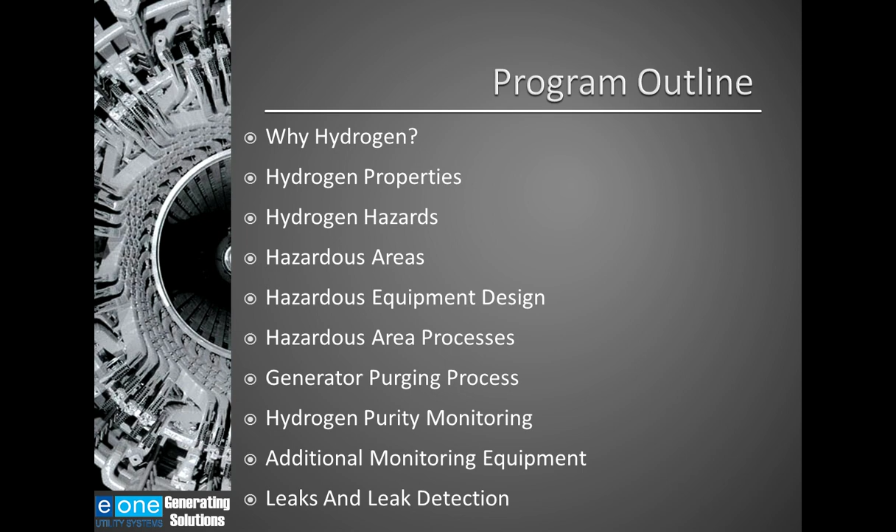We'll begin by reviewing why hydrogen was selected. We'll review the properties of hydrogen and the hazards associated with working with hydrogen. We'll discuss hazardous areas and the equipment design and processes necessary to ensure safe plant operation in this environment, including an overview of the key elements of a safe generator purging process. I'll give an overview of the different types of hydrogen purity monitoring systems and review additional generator monitoring equipment. In closing, we'll review hydrogen leaks and leak detection methods.

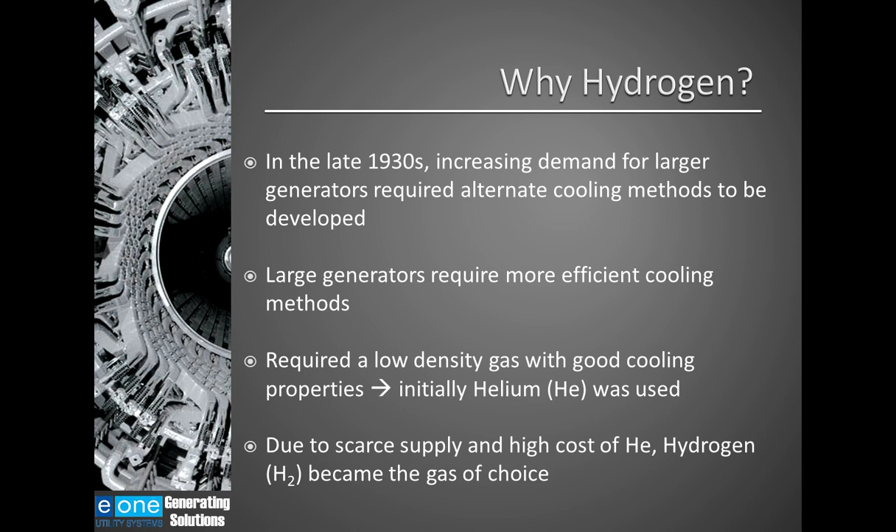Back in the late 1930s, increasing demand for larger generators required alternate cooling methods to be developed. These larger generators required a more efficient cooling method. They were looking for a low-density gas with good cooling properties, and initially helium was selected. Due to the scarce supply of helium and the relatively high cost of helium, hydrogen became the gas of choice.

Hydrogen provides less windage or frictional losses in the rotating rotor of the generator. That's because at generator operating pressures, the relative density of hydrogen is 4 times less than air. Hydrogen has better heat transfer characteristics than air - it is 14 times more efficient at removing heat than air. That is to say, 1 pound of hydrogen will remove 14 times more heat from a given environment than 1 pound of air. For the equipment manufacturers, this all equates to more megawatts per pound of iron.

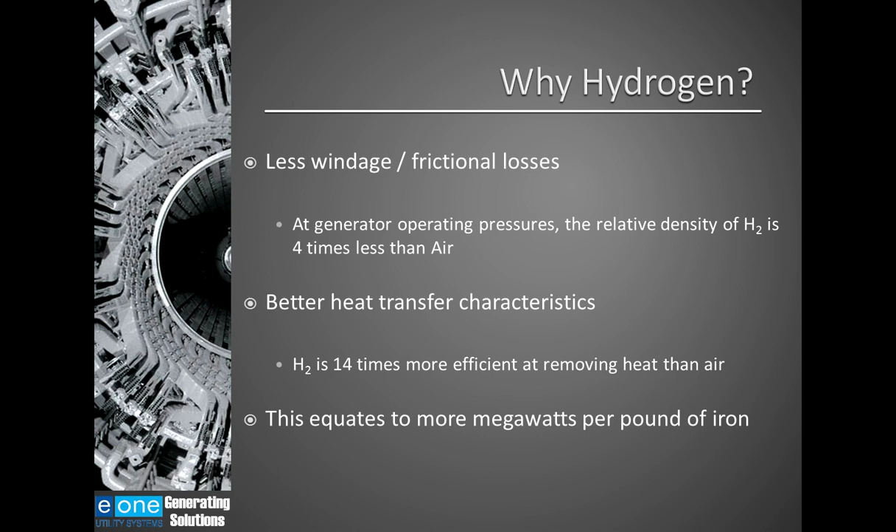Some additional facts about hydrogen's use as a cooling medium. Hydrogen-cooled generators are a sealed environment which prevent contamination within the generator. They are also pressurized vessels. The increased pressure suppresses the partial discharge phenomenon and increases the level of voltage required for component breakdown. A pure hydrogen environment prevents oxidation, which allows generator manufacturers to select lower-cost materials when designing the internals of a generator. Pure hydrogen does not support combustion. Currently, there are more than 10,000 hydrogen-cooled generators operating worldwide.

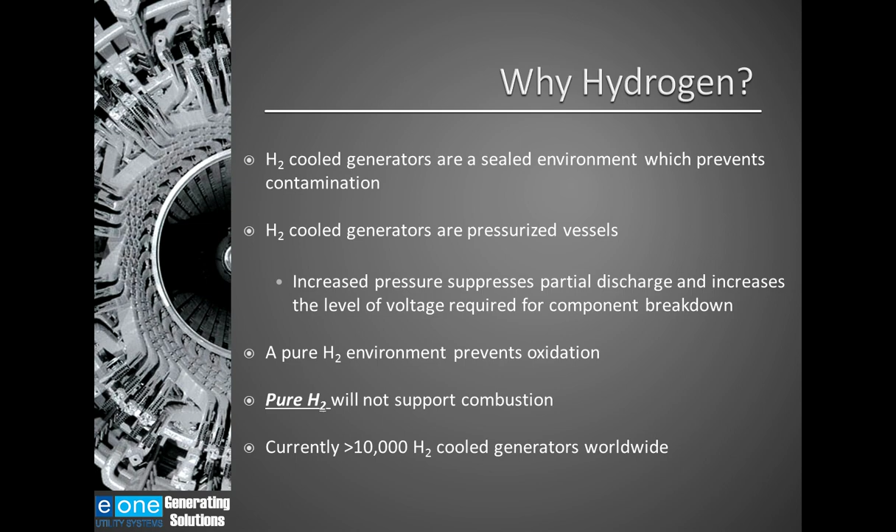For all the chemical engineers in the audience, we'll review some of the properties of hydrogen - this is right out of Praxair's safety data sheet. Hydrogen is a colorless, odorless, and tasteless gas, which makes it undetectable by human senses. Hydrogen is non-toxic, but it can be suffocating by removing oxygen from confined spaces. Hydrogen is not a carcinogen. It is the lightest gas, which allows it to diffuse readily in air.

It's non-corrosive, but it will reduce the mechanical properties of some metals, resulting in embrittlement. Hydrogen burns with an almost invisible bluish flame, which makes it very difficult to detect during daylight conditions should there be a leak in any of your hydrogen auxiliary equipment in your power plant.

The explosive limits of hydrogen are the widest of any combustible gas, ranging from 4% to 76% by volume in air. And the auto ignition temperature in air is very high, 566 degrees centigrade or 1051 degrees Fahrenheit. So if you had a combustible mixture of hydrogen in air, you would have to heat it to 566 centigrade for it to catch fire or cause an explosion.

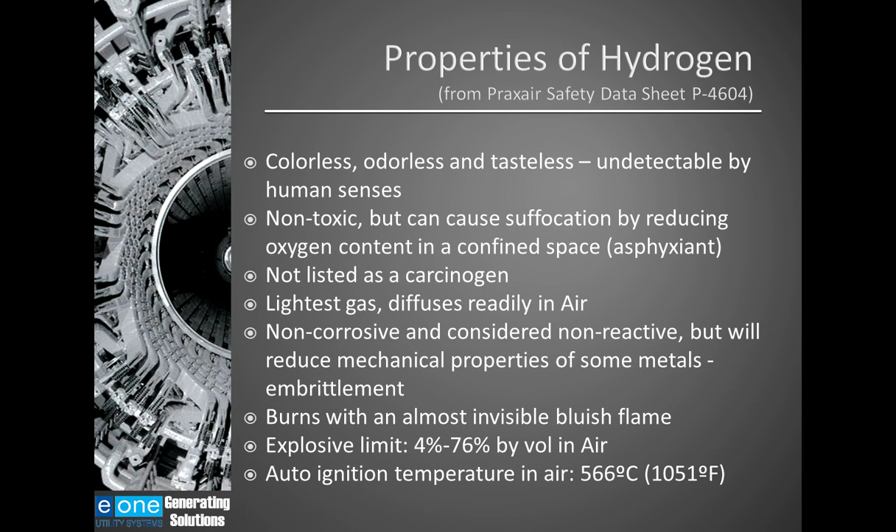Most people are familiar with the elements necessary for fire, represented here by the fire triangle, where you have air plus a fuel plus an ignition source, and that will result in a fire or explosion.

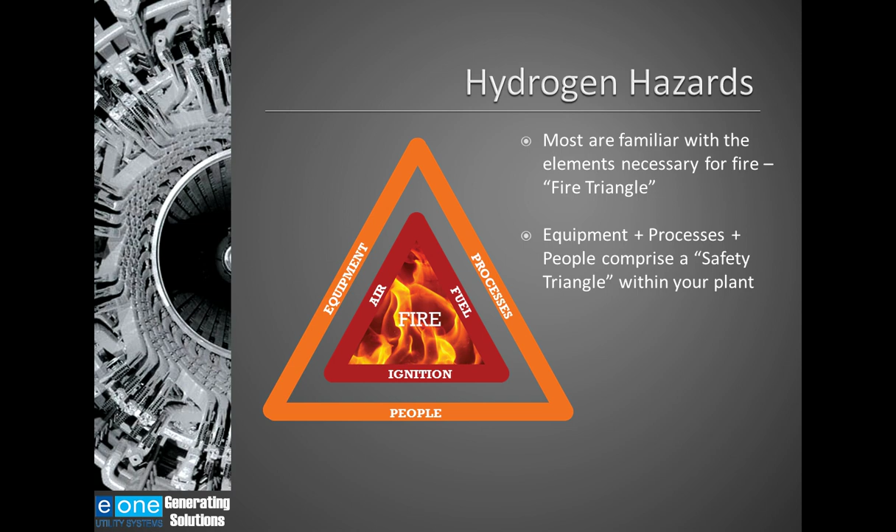Today we're going to introduce you to a concept of a safety triangle comprised of the right equipment, the right processes, and the right people to yield a safe plant operation.

In addition to the inherent risks of working with a flammable gas such as hydrogen, following are some additional risks we're being faced with in the power industry. The fleet is getting older and being asked to operate beyond the original life expectancy. Hand in hand with that, the associated hydrogen auxiliary equipment is getting older and potentially outdated when compared to today's industry standards, which we'll discuss a bit later on.

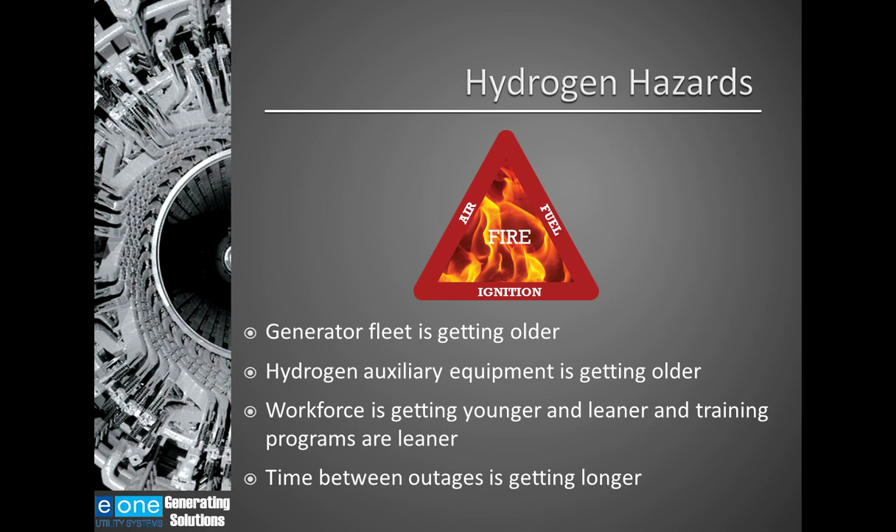The workforce is getting younger and leaner, and compounding this, the training and apprentice programs that are available today aren't what they were even just 10 years ago. And lastly, the outages are getting spaced further apart to maximize runtime. This places additional stresses on the equipment and staff.

Even well-designed and maintained generators can become compromised by these serious operational challenges. We know if proper standard operating procedures are not followed, you can have some very serious problems, including equipment damage and loss of life.

Now we're going to review the specifics of hazardous areas in the power station, the equipment that's designed to operate in these areas, and the important processes necessary to ensure safe plant operation, our safety triangle.

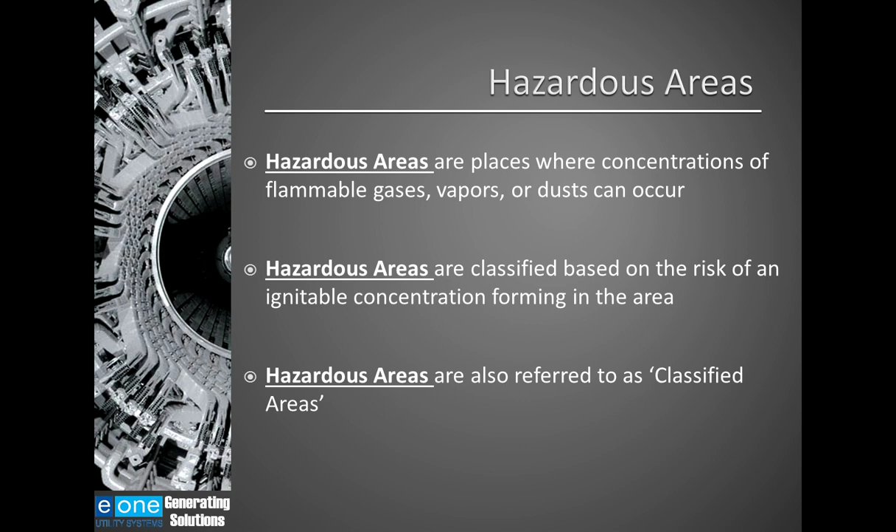So to begin with, hazardous areas are places where concentrations of flammable gases, vapors, or dusts can occur. These hazardous areas are classified based on the risk of an ignitable concentration forming in the hazardous area. These hazardous areas can also be referred to as classified areas. An area classification refers to the rating applied to the area based on the risk of a flammable concentration occurring in that area.

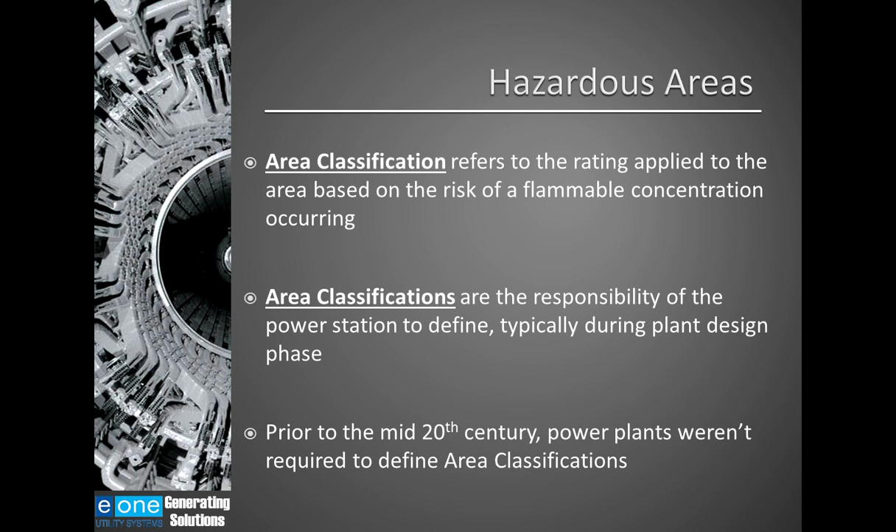These area classifications are the responsibility of the power station to define, and this typically occurs during plant design phase. Prior to the mid-20th century, power plants weren't required to define area classifications, and we found during retrofit and upgrade opportunities this has led to some confusion because power stations aren't even aware of what the hazardous area classification is for their hydrogen auxiliary equipment.

These hazardous area classifications are broken down into 3 zones as they're referred to. A Zone 0 area is an area where a flammable mixture is present at all times. A Zone 1 area is an area where a flammable mixture is sometimes present during normal operation. And the last zone is referred to as Zone 2, and this is an area where a flammable mixture is present only during abnormal conditions. These Zone 2 areas are the applicable area classification for most of the hydrogen auxiliary equipment in your power station.

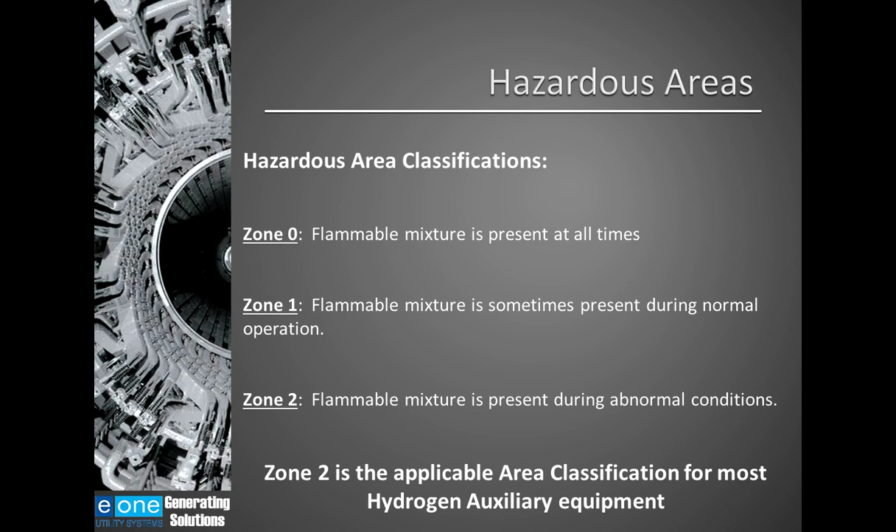The illustration on the screen here is an example of an equipment OEM defining the Zone 2 area created by their piece of equipment. That is to say, within this piece of equipment, there's pressurized hydrogen in the pipework and in the instrumentation, and as a result of that piping, there is a risk of a flammable mixture occurring during abnormal conditions in the hashed out zone that they've illustrated by this picture. These are the drawings that are used by the power stations as part of the plant hazardous area assessment for defining the different zones and classification areas in their power stations.

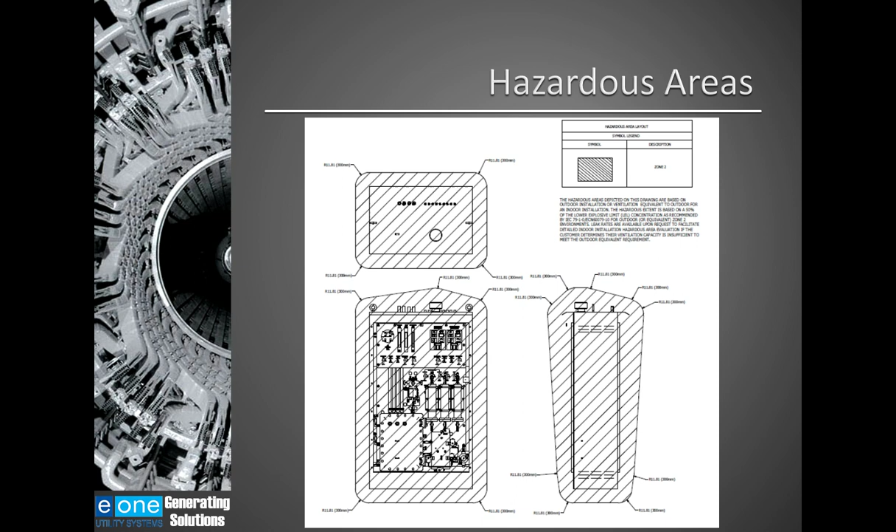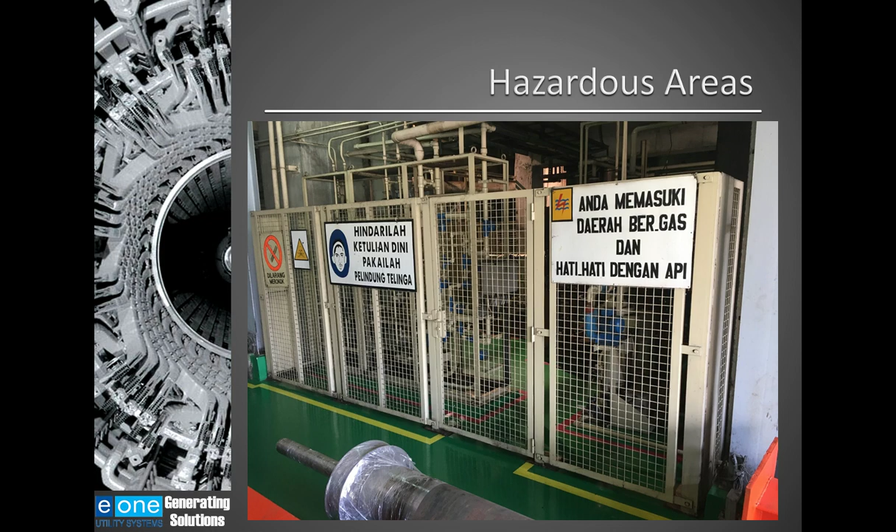The image here is an example of a power station defining and marking the Zone 2 area in their power station. You can see here they went as far as to erect a barrier to limit access to the area, and they've used that barrier to also serve as the markings and signage to appropriately warn individuals of the hazards present and safety precautions that need to be taken.

Now that we have an understanding of hazardous areas, let's review the equipment design requirements for these areas. Hazardous areas require specialized equipment. You can't just run out to Napa or McMaster Carr and purchase a piece of equipment and install it in a hazardous area.

The equipment needs to be designed to operate in the respective area classification for that installation. In our case, for hydrogen use, the markings on the piece of equipment would carry Roman numeral 2, the letter capital B, plus H2 for hydrogen, or the Roman numeral 2 and capital C. Either of those markings are appropriate for equipment to be installed in an area that's classified for hydrogen.

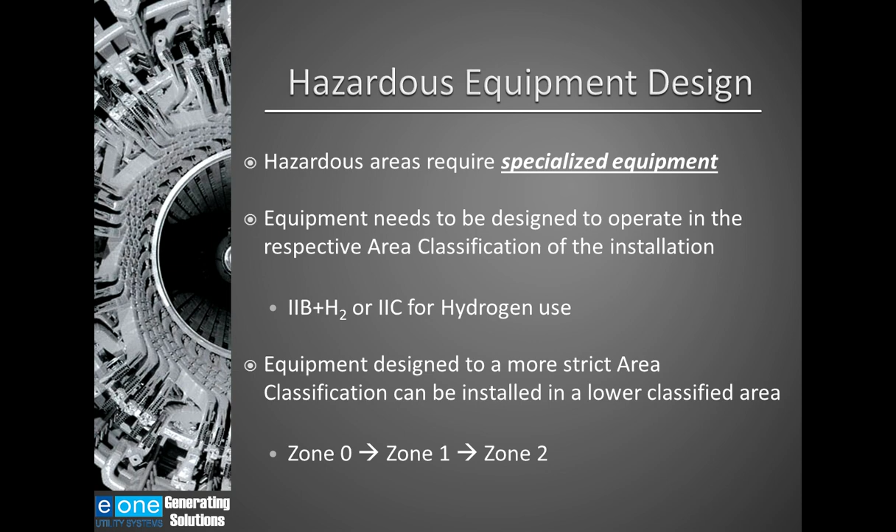Equipment that's designed to a more strict area classification can also be installed in a lower classified area. So if you've got a piece of equipment in your power station that's designed for a Zone 0 area classification, it can be installed in a Zone 0, a Zone 1, or a Zone 2 area. For a piece of equipment that's designed for Zone 1 application, it can be installed in Zone 1 or Zone 2. And for a piece of equipment that's designed for a Zone 2 area, it can only be installed in a Zone 2 area.

Within the design of the equipment, there are different protection principles that are applied by the equipment manufacturers to meet the hazardous area requirements. These protection principles will vary from equipment OEM to equipment OEM and from device to device, depending on the characteristic of the equipment. The first principle we're going to review is a piece of equipment that has no arcs, sparks, or hot surfaces.

Within that principle, there are two methods that are applied. One is referred to as increased safety, and a piece of equipment marked for increased safety will carry the small letter E. The second method is referred to as non-sparking, and a piece of equipment designed for non-sparking would carry the letters NA.

In the image on the screen here, we have an example of a Type E protection principle. That's the metal enclosure. It's a Type E enclosure with a non-sparking piece of equipment installed in it, illustrated here by the power strip.

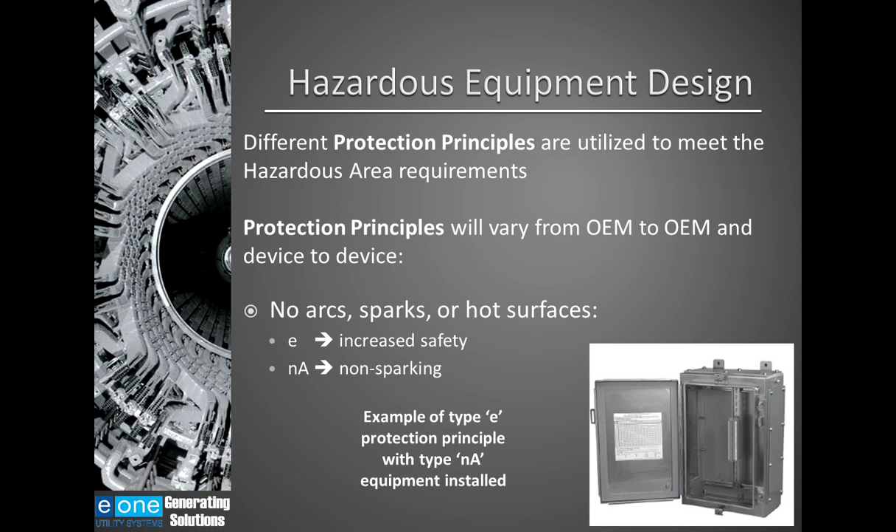The next protection principle is to contain the explosion and extinguish the flame. There are three methods within this principle, the first being referred to as flame-proof, and the equipment designed for the flame-proof method is marked with the small letter D. The next method is powder-filled. A powder-filled piece of equipment will be marked with the small letter Q. And the final method is referred to as enclosed break, and that piece of equipment would be marked with the letters NC.

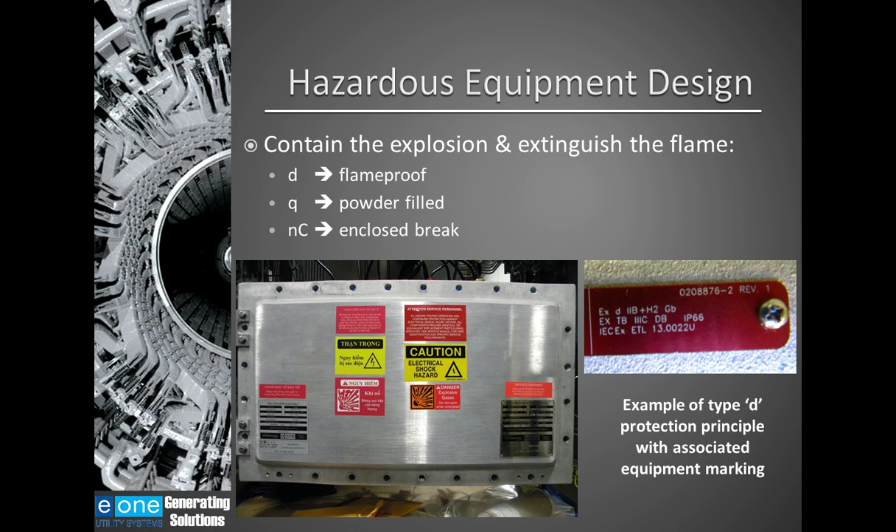The next principle we'll review is referred to as limiting the energy of sparks and the surface temperature. There are two methods within this principle. The first is intrinsic safety. Equipment marked for intrinsic safety would carry the small letter I, followed by the letters A, B, or C. There are three sub-methods within the intrinsic safety design concept. Limited energy is the other method. A piece of equipment under that concept would carry the letters NL.

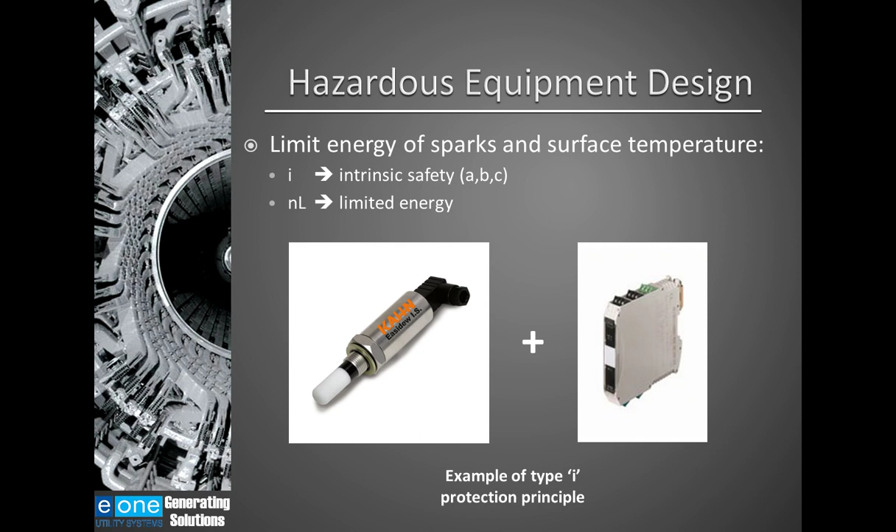Protection principles such as intrinsic safety and limited energy typically require two pieces of equipment to meet the overall requirement for that principle. One piece of equipment is installed in the hazardous area, and the second piece is installed in the general purpose area. For the image on screen, we have a dew point sensor and the corresponding barrier or safety shunt that matches up with it. The dew point sensor is installed in the flame-proof or hazardous area, and the barrier is installed in a device such as the flame-proof enclosure or in another general purpose area.

The last protection principle we have to discuss is keeping flammable gases out of the area in question. There are three methods within this principle, the first being pressurized equipment.

Pressurized equipment will be marked with a small p followed by the letters X, Y, or Z. There are three sub-methods associated with pressurization. A restricted breathing apparatus would carry the letters NR.

A piece of equipment protected via encapsulation would carry the small letter M followed by the letter A or B. There are two sub-methods within that encapsulation method. An oil immersion method would carry the letter O.

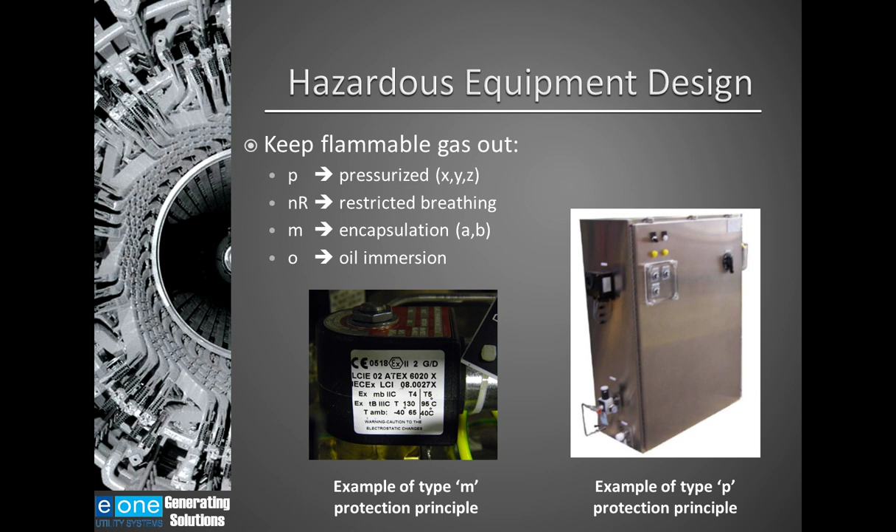Pressurization usually involves multiple pieces of equipment: a regulator to limit airflow into the equipment, a pressure sensor to monitor the differential pressure between inside the equipment and the ambient air, and electronics that detect a lack of pressure and isolate electrical power to that equipment if pressurization is lost.

All the material I've just covered is intended to provide an overview of hazardous areas and the equipment designed for these areas. There are specific courses offered through notified bodies such as Intertek, FM, and UL that go into a lot of detail on this topic, and these are highly recommended for plant personnel responsible for hydrogen-cooled generators and associated hydrogen auxiliary equipment.

Now let's review some of the processes related to working in these hazardous areas. As you can be certain, the risks of hazardous areas require precaution, and operator training is the most critical element of safe plant operation.

Adequate signage identifying the hazardous areas and what safety precautions need to be followed is also very important, as we illustrated in the example a few slides ago.

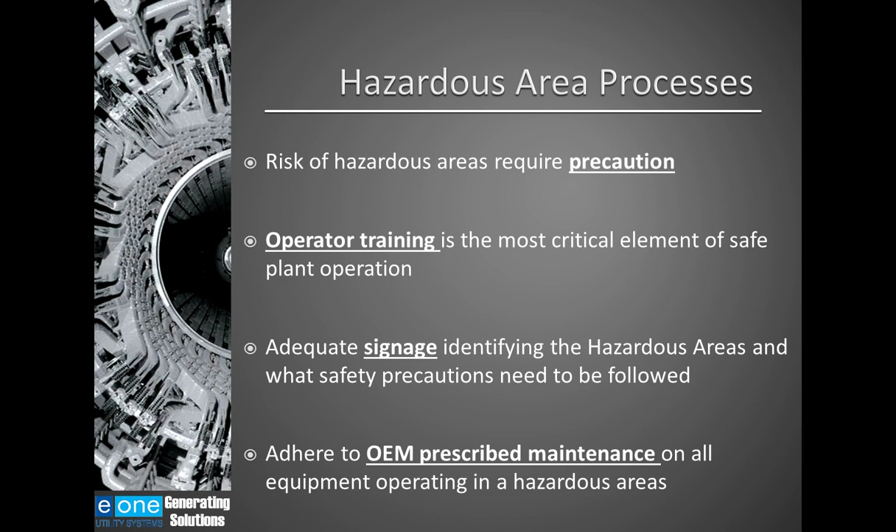Adhering to the OEM prescribed maintenance intervals and the maintenance processes on all the equipment operating in the hazardous area is also very important.

Using qualified EX certified maintenance personnel for equipment in hazardous areas is a good best practice. There are specific courses you could have your staff attend, or you could request that personnel coming to do maintenance on your equipment present proof of their certification to that standard.

Regular calibration of your hydrogen purity meter is obviously very important, along with strict adherence to the generator purge procedure, which we'll discuss a little more in a moment.

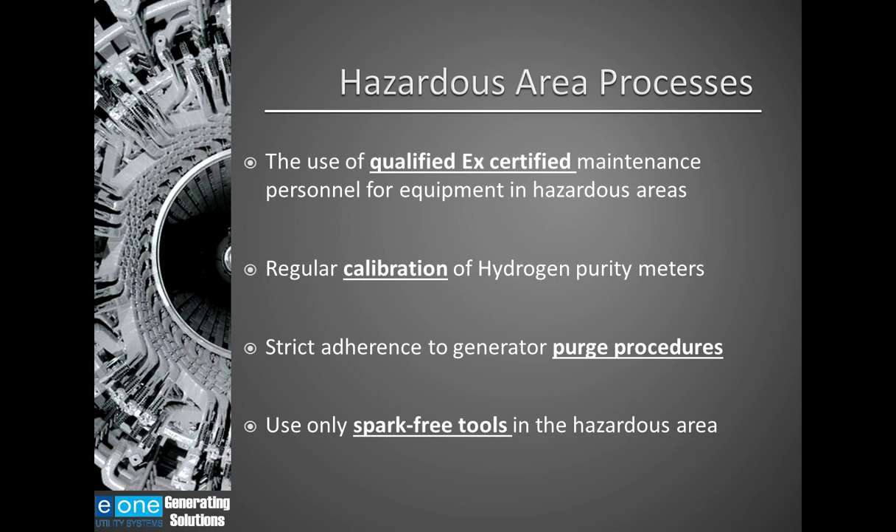The use of only spark-free tools in the hazardous area is also a very important best practice for hazardous area processes. Again, these are examples of the critical elements that comprise safe plant operation when working in hazardous areas.

One of the most critical processes associated with hydrogen-cooled generators is the generator purging process. As outages become less frequent, plant personnel may not have had any experience purging a generator when the time comes. Having a good, solid purge procedure and associated equipment are critical to safe plant operation.

It begins with an updated and understood standard operating procedure. Hand in hand with that, having a current and accurate P&ID of your hydrogen auxiliary equipment is very important. If you've made any improvements or modifications to your hydrogen auxiliary system, ensure those updates have been incorporated in the P&ID and the SOP.

Along with that, verify that all the valves and equipment are properly labeled and agree with that updated P&ID to make it clear for your operators. Also verify that your hydrogen purity meter is calibrated and operating properly.

If you're using a portable gas analyzer for your purge process, ensure that it is also calibrated and operating properly. The use of portable hydrogen sniffers is recommended, as well as the old standby liquid leak detectors such as Snoop or soap.

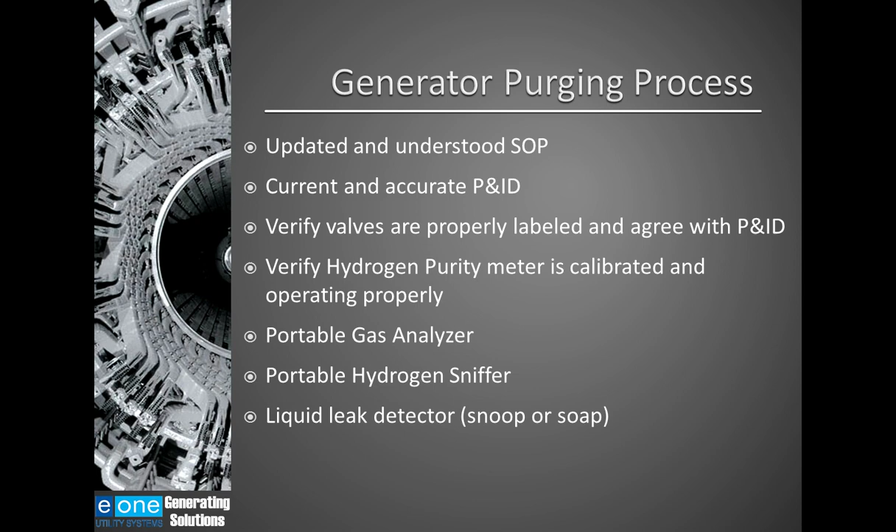Personal LELs, or lower explosive limit detectors, are also recommended for all the operators working in the hydrogen area. You mentioned the use of non-sparking tools made of a material such as bronze.

Ensuring that you have sufficient carbon dioxide present in the plant to purge all the generators on site. So if you're a power station operating multiple generators and you're doing a purge process on one of those generators, it's important to have appropriate volume of carbon dioxide present to purge all the generators should there be an event during the purge process of the generator you're working on.

Having signage available to note which gas is in the generator. Having a keyed lockout for the air and hydrogen supply system is also very important. It doesn't ensure that air and hydrogen won't be admitted to the generator, but it certainly goes a long way to mitigate that risk.

Communicate, communicate, communicate. As we know, communication is usually the key point that leads to breakdowns, and we can't stress that enough. Including your operations team and your I&C team together is also a very good best practice.

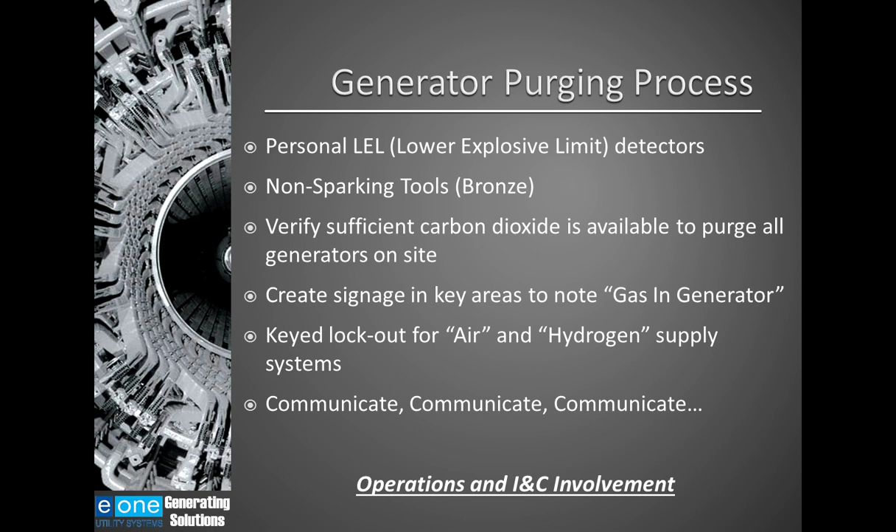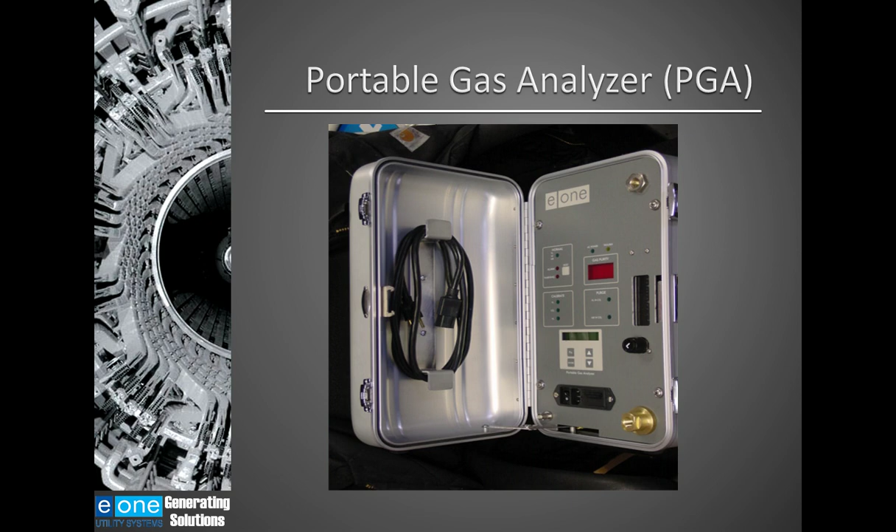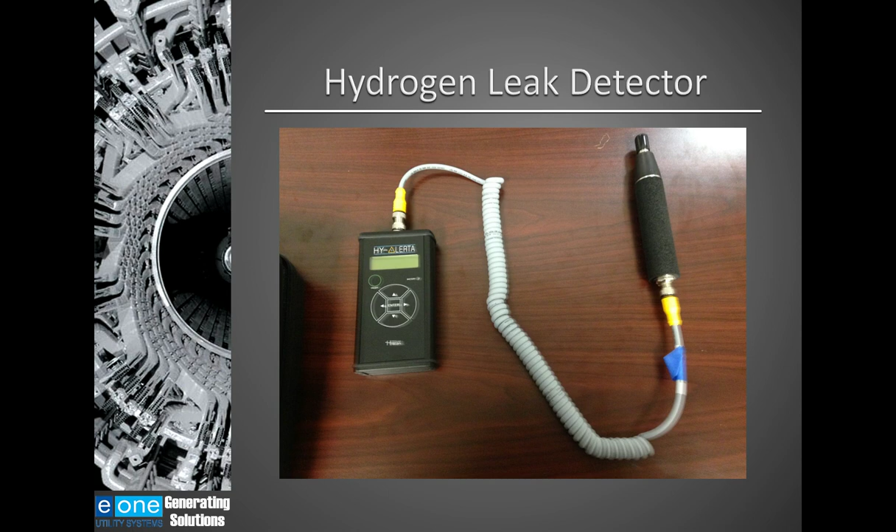During the generator purge process, valves and pipework that haven't carried gas potentially in several years will be in service. The condition of the valve packing and tube and/or pipe joints may be suspect. The use of handheld hydrogen leak detectors such as this model are important tools to ensure the safety of the personnel working in the environment and for detecting the need to repair or upgrade worn-out valves and pipework.

As with the handheld leak detector, the personal LEL detectors are critical safety devices for the personnel working in the hydrogen auxiliary system area and in and around the generator.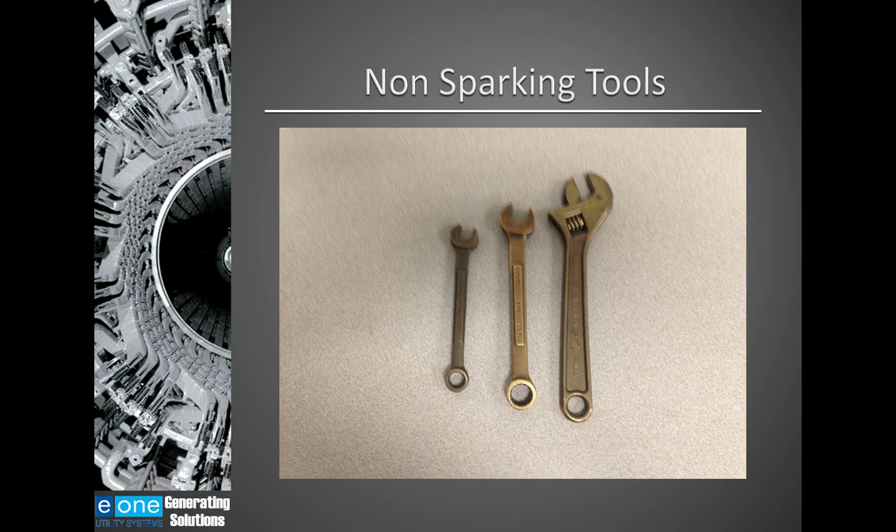So now that we've safely purged and filled the generator, let's discuss one of the most critical pieces of equipment on your hydrogen-cooled generator, which is your hydrogen purity monitoring system.

Online hydrogen purity monitoring is mandatory on all hydrogen-cooled generators. There are two primary methods for measuring hydrogen purity: density meters and thermal conductivity meters. Now, there are pros and cons to the design principles of both, and different techniques are applied by the purity meter OEMs within each measuring method.

It's important that as a plant operator, you know which type you have, you know that it is maintained per the OEM recommendations, and that it is operating properly at all times.

Now, the different generator OEMs integrate the hydrogen purity meters into skids or cabinets that are referred to as hydrogen control panels or hydrogen control cabinets. Internationally, they're also referred to as hydrogen cubicles.

These installation types can vary greatly from generator OEM to generator OEM and from plant type to plant type. Knowing and understanding the specifics of your plant system is vital to safe plant operation.

Lastly, the type of seal oil system on your generator also impacts the hydrogen purity system. A vacuum seal oil system will employ a closed-loop style hydrogen purity monitor where the hydrogen is constantly circulated from generator fan pressure to generator fan suction, and the purity meter is measuring the case purity at generator pressure.

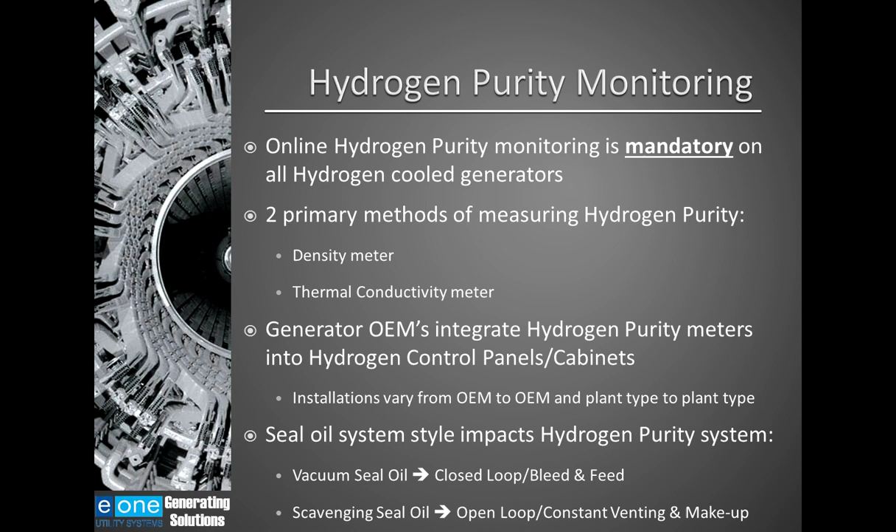In these systems, the purity meter is measuring the purity of the gas in the headspace of the seal drain enlargement tank and can be measuring at generator pressure or at atmospheric pressure, depending on the configuration.

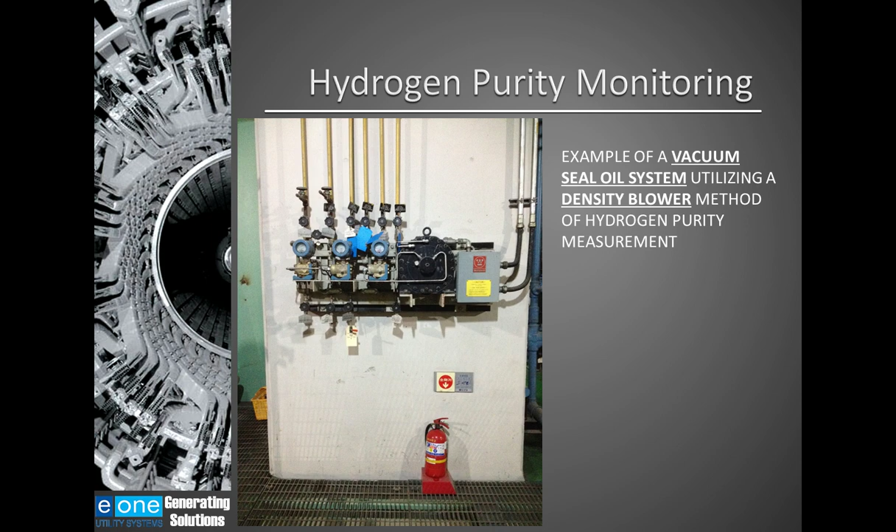The image on the screen here is an example of a vacuum seal oil system utilizing a density blower method of hydrogen purity measurement. You can see the different pressure transmitters that are there that are measuring case pressure, fan differential pressure, and then the associated differential pressure generated by the fixed speed of the density blower.

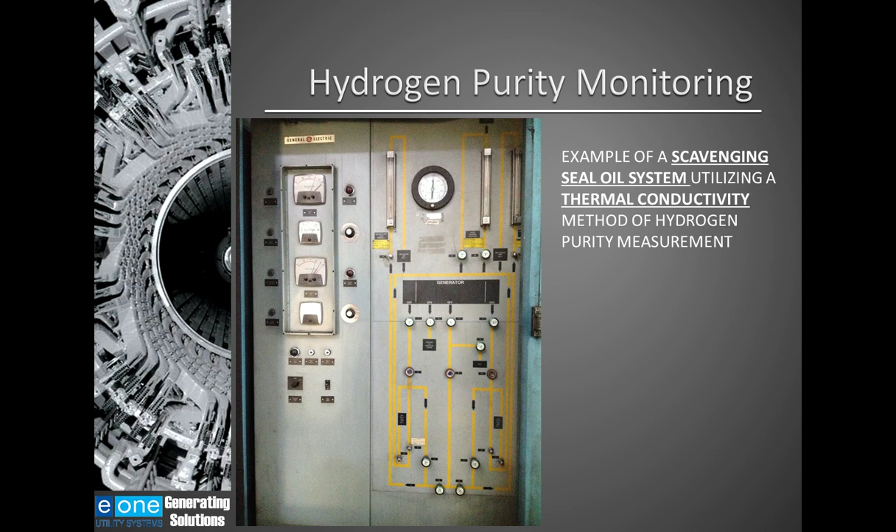And these are just two examples of a very large variety of hydrogen purity systems that are in use today.

Online monitoring devices are also important tools to assure reliability and optimum performance of your generator. As risk factors increase, additional monitoring becomes necessary. This simple graph depicts the risk versus level of monitoring relationship.

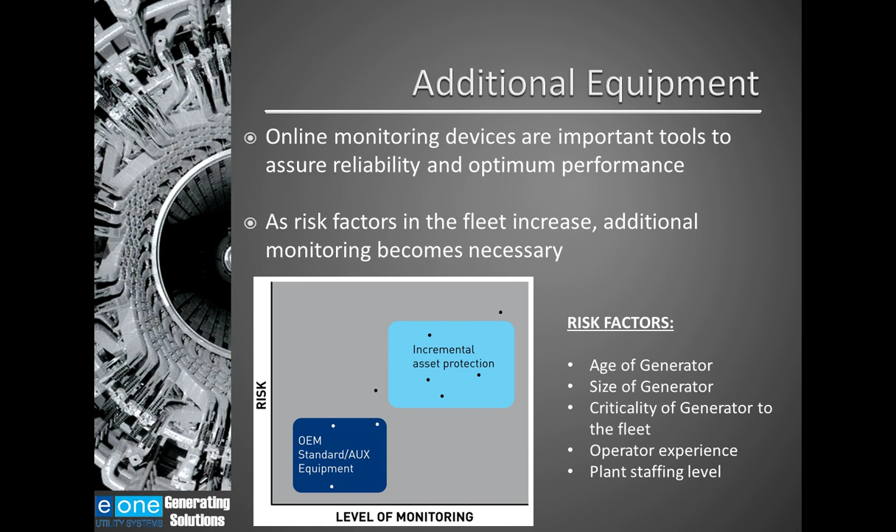Different generator OEMs provide a basic level of monitoring unless otherwise selected by the utility during plant construction. As risk factors in the fleet or plant increase, additional monitoring becomes necessary. Some of the risk factors used for this evaluation include the age of the generator, the size of the generator, the criticality of the generator to the fleet, the level of experience of the operators, and overall plant staffing levels.

Some of the additional equipment available includes additional temperature sensors that can be installed within the core itself, at the back of the core, or in the stator cooling water system for generators with water-cooled stators. Again, those additional temperature sensors will be monitoring for hot spots and other overheat conditions.

A flux probe can be installed and used to detect shorted rotor turns. A generator condition monitor can be installed and used to detect the early stages of generator overheat and arcing. Additional vibration sensors can be installed on the end turns or along the frame to detect loose core wedging or rotor imbalance due to hot spots or shorted turns.

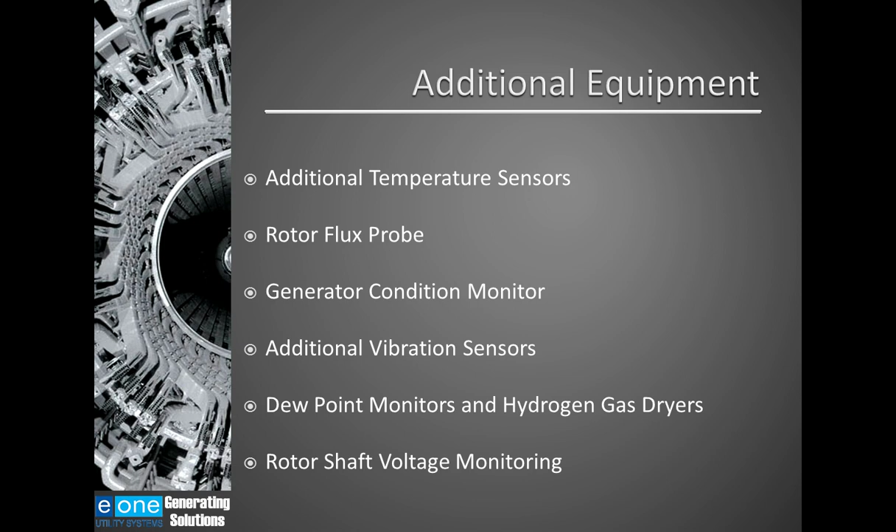High dew point related failures such as retaining ring failure and insulation breakdown can be prevented with online dew point monitoring and the use of hydrogen gas dryers. Rotor shaft voltage monitoring can be used to detect voltages that could result in current discharges and electrical pitting on the rotor surfaces. Again, these are just some examples of additional online monitoring equipment that can be used on your hydrogen-cooled generator.

Because the generator case is pressurized, there are numerous locations where hydrogen can leak. Some examples are the hydrogen coolers, the rotating hydrogen seals, and any piping connections, flanges, or bolt-on inspection covers. Hydrogen leaks can also occur in auxiliary equipment that is connected to the generator.

The allowable daily leakage from the generator is always specified by the manufacturer and is determined by the hydrogen usage. The hydrogen usage is either monitored by the simple method of counting the number of bottles consumed on a daily or weekly basis, or some generators have online mass flow totalizers that actively measure the hydrogen usage.

There are different methods used for leak detection. Some examples are the good old standby, such as liquid soap or Snoop. You can use ultrasonic leak detectors, handheld leak detectors such as we illustrated earlier, or the infrared leak detection method.

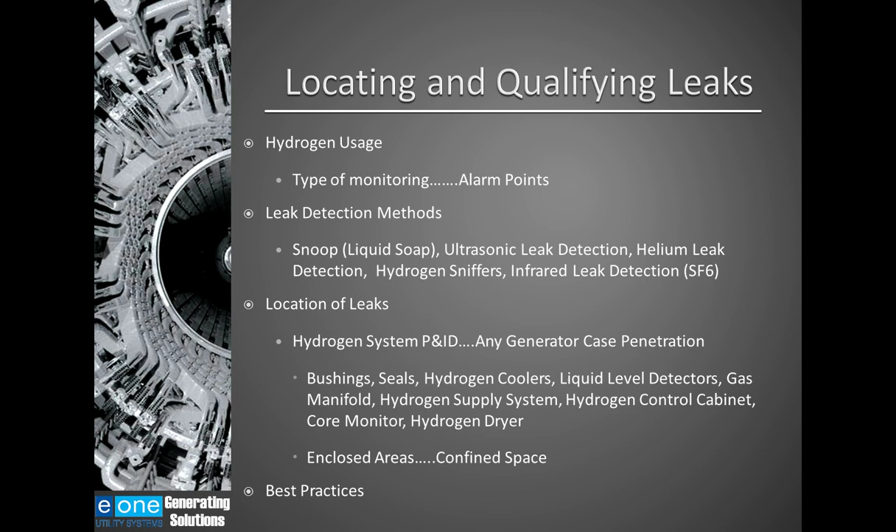Although hydrogen dissipates quickly in air, it is important to also be aware of areas near and around the generator where hydrogen can trap and accumulate. A best practice for hydrogen leak detection is to use a detailed pictorial guide to show personnel where to inspect for hydrogen leaks, and all plants should have a well-written procedure on locating hydrogen leaks.

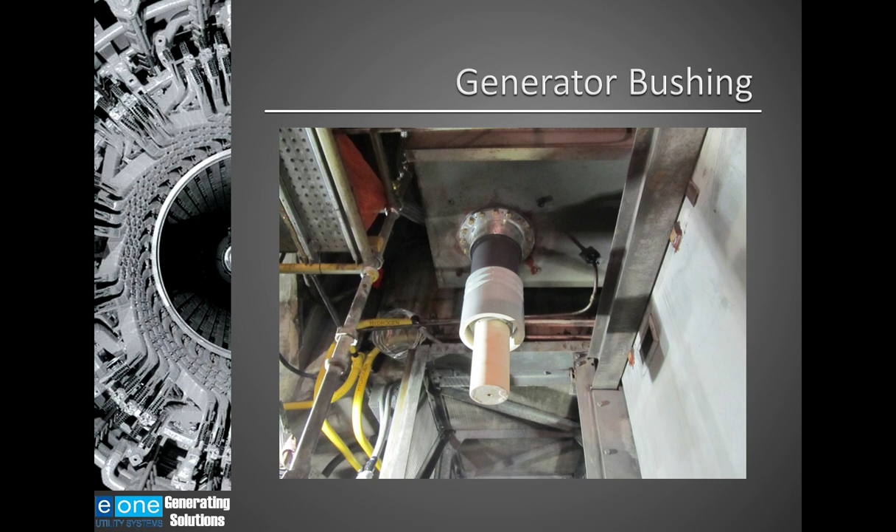In closing, hydrogen is an excellent cooling gas, but if it is not handled properly, it can be very dangerous. Hazardous areas are present in power plants and require specialized equipment and processes to be followed. Generator purging procedures must be up to date, well written, and adhered to. Online hydrogen purity monitors are mandatory and need to be properly maintained. And all power plants should have procedures for locating and repairing hydrogen leaks. It's all about safety, risk mitigation, and reliability.